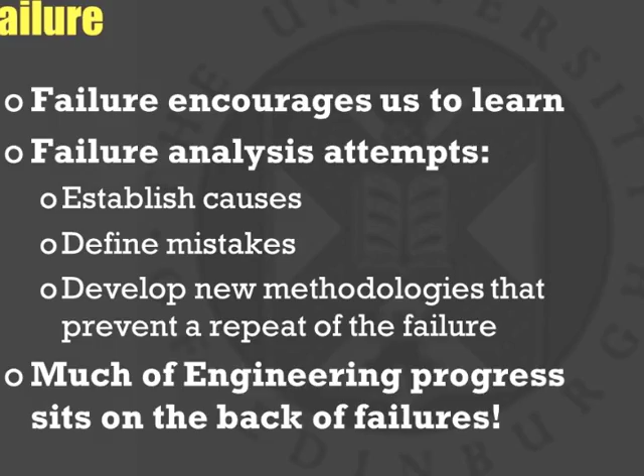And the truth is that much of engineering sits on this kind of failure. We've learned from aircraft crashes, we've learned from train derailments, we've learned from collapsing buildings, we've learned from bridges falling down. A lot of engineering actually relies on failures to wake ourselves up, to open our eyes and allow us to start reflecting. But the key part of understanding a failure is the failure analysis.

If we don't do a proper failure analysis, if we don't have the tools for a proper failure analysis, the tragedy is wasted. And this is the one thing that we have to try to avoid. This is the one thing that we deeply have to prevent, because given that the tragedy is there, the failure has to be able to enable us to understand what our mistakes were.

So in a way, this is the line of thought of this presentation: understanding from the failure analysis, understanding from what happened that day, and understanding from our current practices how we actually design buildings better. Are engineers learning from disasters? This is really what we would like to do.

The problem in this type of situation is that when you're looking into a disaster like the World Trade Center, it's a combination of a number of different things: the actual physical event, our perception of the nature of the event, and all the politics associated to an event that was so visible and originated in a political issue. So the investigation in this particular case was very difficult, requiring the handling of so many things that in many cases prevented the true understanding of the problem.

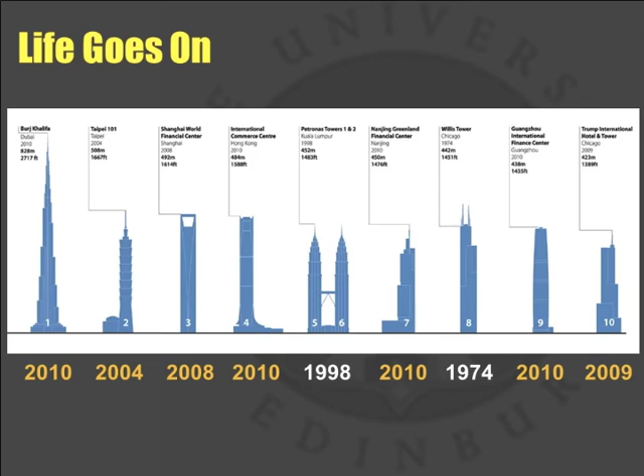Now, this is what's been happening in our world of tall buildings. If you look at the top 10 highest buildings in the world, 8 of those have been built after 2001. If you look at the top 100, you will easily go above 40 top buildings being designed and built after 2001.

So we are trying to understand what made these buildings fail, and in the meantime we're building more complex, taller, more sophisticated buildings every day. This is what industry does, this is what evolution does, this is what innovation does. We have to move on, and we didn't move on only in height, but also in complexity.

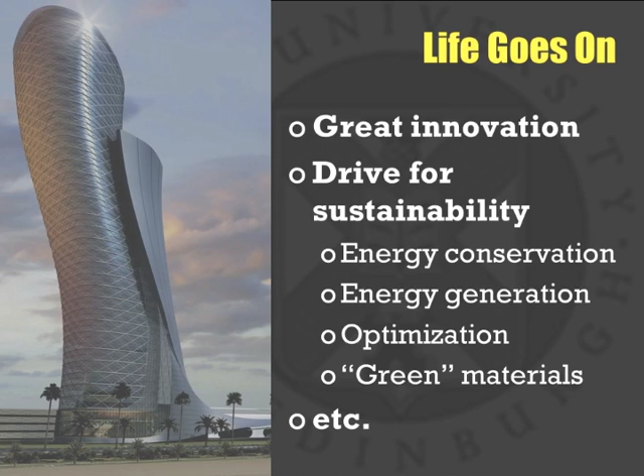This building, if you look at it, has certain particularities. First of all, it's a tall building. Second, it's the most inclined building in the world. All of a sudden you're introducing structural constraints that are extremely unique, pushing the envelope beyond what we had done in the past. Buildings like this are not built every day, nevertheless buildings like this are built more and more often. Now, inclining this structure like this, does it make it more vulnerable to fire?

These are the kinds of questions we need to ask ourselves. When we design and build the World Trade Center, we design and build it on the basis of certain criteria, certain rules, certain codes, certain standards, certain tools. Nevertheless, those tools, codes, standards, and criteria failed on us. Now we're building a building that poses all sorts of new sets of questions, and we truly are in a position where we really do not have the answer.

But life goes on. Not only do we do that, but for example, we're using these curtain walls. Curtain walls represent a very interesting fire problem because in a way they create the potential of gaps between the floors and the wall that enables the fire to grow very fast. And we've seen that in a couple of tragedies in Shanghai and the CCTV towers in China just recently.

So not only are we putting curtain walls, but we're creating double skin facades. Why do we do that? Because of sustainability, energy conservation. These are the drivers of our industry. Fire engineering is this little. We're being pushed around left and right because people want green buildings, they want energy conservation, they want to put energy generation and put a huge turbine on top of the building.

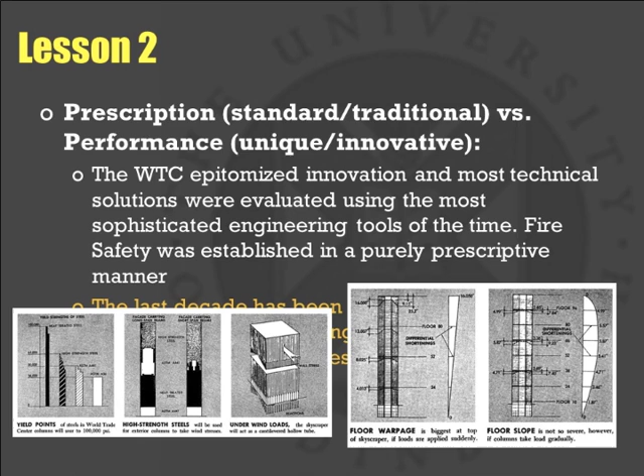Now, the second lesson that we learned was the application of that. So basically, prescription versus performance. Now, what is prescription? Prescription is basically looking into buildings, seeing buildings that are fundamentally homogeneous, that have so many things in common that I can classify them in a way such that the same rules apply to all of them.

So I can more or less establish that these buildings work correctly, and once they're classified, then I can say, if I use this set of rules and you follow the rules strictly, I can more or less guarantee you that these buildings will work. Nevertheless, there's never an independent analysis of each building to establish its true performance.

Now, performance design is a design that uses all engineering tools to try to look in a proactive way how this building is going to perform. Now, if the building cannot be classified, if the building is unique in nature, then we are required to do a performance analysis. We have to be able to establish if that building is going to be safe.

So this question comes up. What are tall buildings? Tall buildings are by definition unique and innovative. They're optimized structures, and therefore they require, by necessity, some form of performance-based analysis.

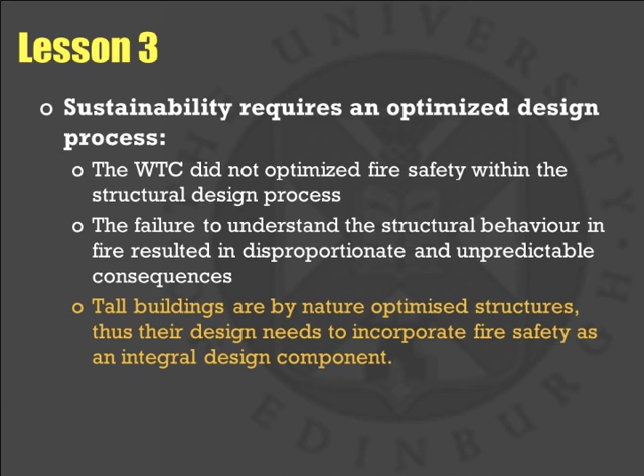Now, third lesson: sustainability requires optimized design. This is very important because when you're looking into sustainability and trying to minimize consumption, trying to minimize energy, trying to conserve as much energy as you can, you also have to include fire, and integrate all this in an optimized manner. The only way you can do this is by putting fire safety into the design process in exactly the same way. Now, the World Trade Center did not optimize fire safety, it slapped it on.

Basically, the building was finished, it was done, it was completed, and what did we say? Let's put fireproofing on it, let's delay the heating of the structure, and it'll work. We believed it would work, but it didn't. So we didn't optimize fire safety into the design process, and we made a big mistake by not doing it.

So the failure to understand the structural behavior in fire resulted in the disproportionate failure. That was the key. The problem was that the structural engineers did not understand fire. They designed the building for everything else, and they delegated fire to the prescription. The architect prescribed a thickness of fireproofing, end of story. There was never an analysis that actually was done to show truly how this building was going to perform structurally in the event of a fire.

Now, tall buildings are by nature optimized structures, and therefore their design needs to incorporate fire safety as an integral part of the optimization process. If we don't do this, then the buildings are not going to perform adequately, they're not going to be optimized, and therefore they're not going to meet the goals of sustainability.

Let me give you an example of what really happened. If you look at the way we design buildings, basically we created this curve. This curve is what we call the standard fire, and it's a normalized curve by the Americans, by ISO, by British. Everywhere in the world, from Chile to China, you will find fundamentally the same curve. So what is this curve? It's a standard fire, a curve against which we're going to test our structural elements.

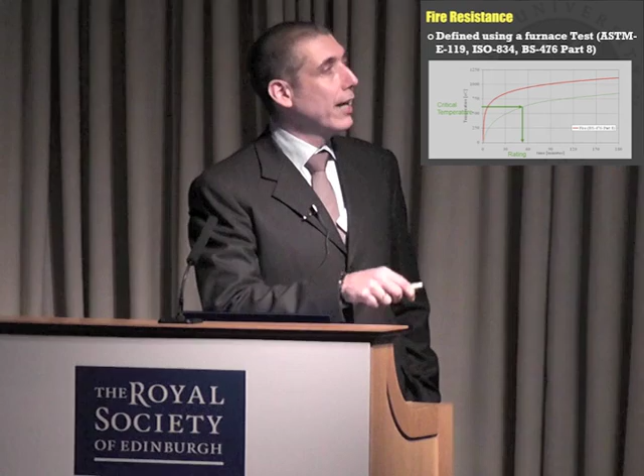What does it represent? The worst case fire scenario. We run a whole bunch of experiments and tests, and all the temperature evolutions of this fire fell below this curve. So we can argue that this curve represents a worst case scenario. Now, our knowledge has shown us that maybe it's not necessarily the case, but within the confines of most of the things that we do, fundamentally it does represent to some extent a worst case scenario.

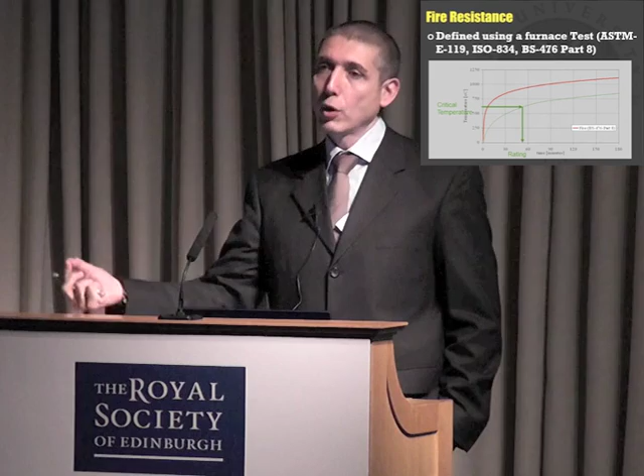So now we take this curve that represents the worst possible fire, and we reproduce it in a furnace. We make a furnace follow that temperature-time curve, and in that furnace we're going to stick a structural element. The structural element, because it's heavy, because it has mass, is going to heat much slower than the furnace, and eventually it's going to reach some sort of critical temperature.

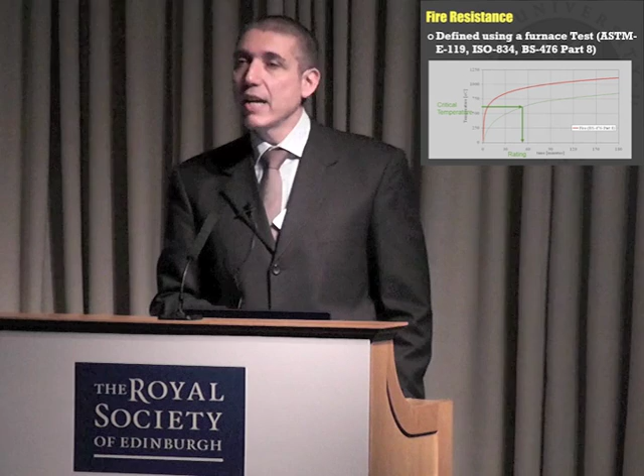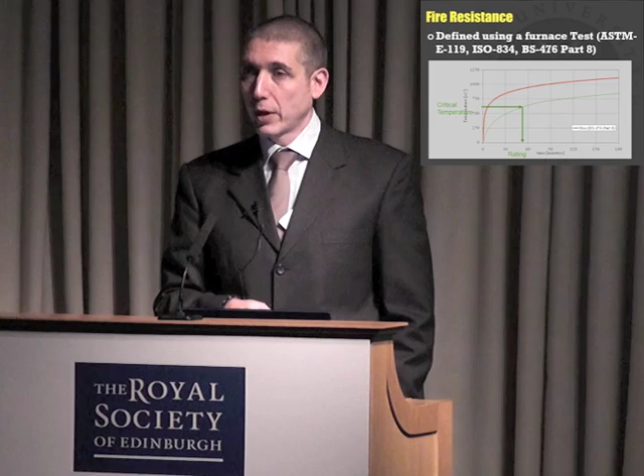That's going to bring us to what we call the fire rating. So we can say, for example, that if this structure fails at this point, I will go to the next 30-minute mark below and say that the rating of the structure is 30 minutes. If that is less than what prescription requires, I will put insulation to try to delay the heating and bring the failure temperature to a much longer period of time.

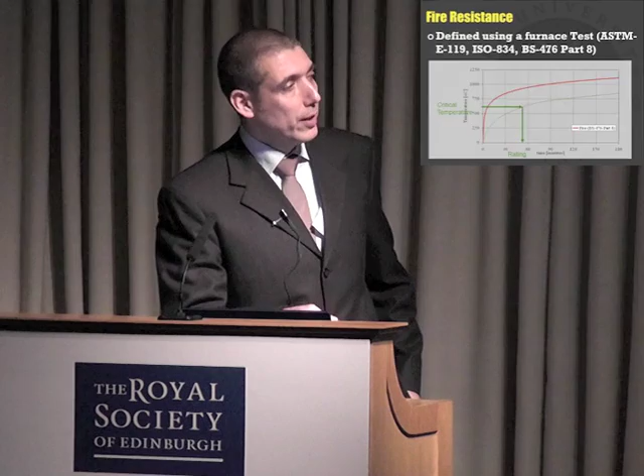The World Trade Center was designed, some of their components, to withstand 3 hours, 180 minutes, and other components, the smaller minor components, to withstand 2 hours, 120 minutes. This didn't work. Now, the question is, the buildings failed in less than an hour.

So, is it the problem that our fire was not a worst-case scenario? That's what people will argue. They will say, well, kerosene fire, very large fire, extremely hot temperatures. Completely false. That fire was actually a very moderate fire that was well within the context of this worst-case scenario. It was not the fire. The fire was not as big and as hot and as deadly as people thought. The fire was an office fire that was well within the constraints of the problem.

Now, what was the problem? The problem was the structure. It was the innovation that was embedded in the structure that fundamentally changed this.

Now, this critical temperature is defined on the basis of material properties. Basically, when steel heats up, its resistance drops. So when it drops to 50%, I define it as my critical failure condition. That's completely arbitrary, unrelated to the design of the building or how you put it together.

In the 90s, we learned that it's absolutely critical how you put a building together to define what this failure temperature was. So relying on our prescription was a problem. We should not have relied on this critical temperature, and this was the weakness of the design.

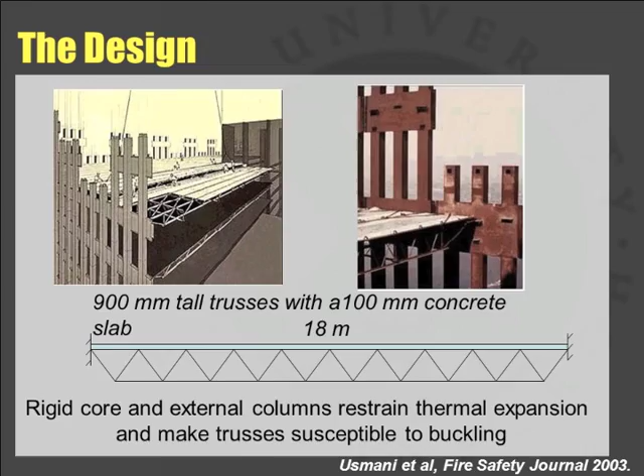So if I look at the problem, basically what was it? You had a very rigid set of columns on the outside, a very rigid core in the middle, and a very lightweight slab. This enabled building this structure—a technological innovation that allowed it to be built fast, cheap, economically, and with open spaces that were very desirable. So fundamentally, it worked as a structure.

But what happens when you completely constrain something very lightweight? As soon as it starts heating up, it tries to push its way out, and it can't, because it's restrained by very rigid columns and a rigid core. Because it can't expand, it buckles. At the beginning it's pushing the columns out, so you can see them bending outward. But eventually, when it fails, it brings the columns back in.

There's no controversy on that. We understand that now—we've learned it from the World Trade Center. We've learned that that was the failure mode for these buildings.

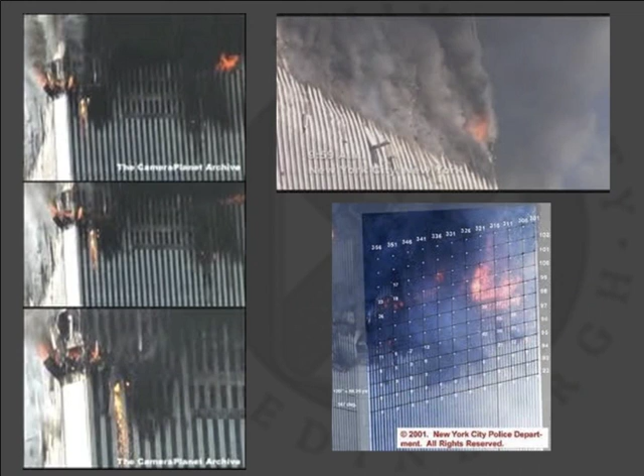Now, if you look at these photographs, you will see it. Earlier in the fire, you can see how the columns are being pushed out and the covers are falling off because the floors are trying to expand and push the columns out, but they can't. Later in the fire, you see the opposite—the floors are sagging, and the columns bend inward, and eventually that's what brings the columns to buckle and the building to come down.

NIST did a reconstruction where they aligned every single column and showed the deflections. Early on they were outward, later on they were inward. At the moment the collapse was triggered, you could see these columns moving inward in certain areas of the building.

There's no controversy on this—we understand that that is the failure mechanism. The details are very difficult to understand, but the fundamental failure mechanism is well understood.

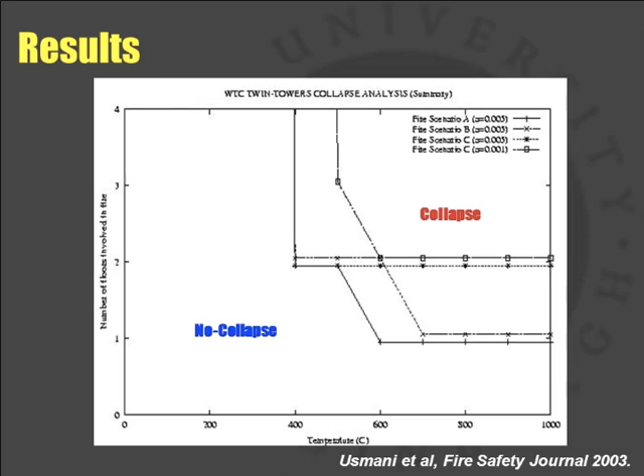But this is a part that very few people understand. If you actually look at this building with no damage, with the actual fireproofing intact, this is an engineering analysis done on the intact building that shows it had a massive vulnerability. Because of the nature of the structure, when you analyze the range of collapse and no collapse, you can see that if a fire extends for more than two floors, your failure temperatures are not 500 or 600 as your materials should give you, but they actually go down as low as 400 or even less.

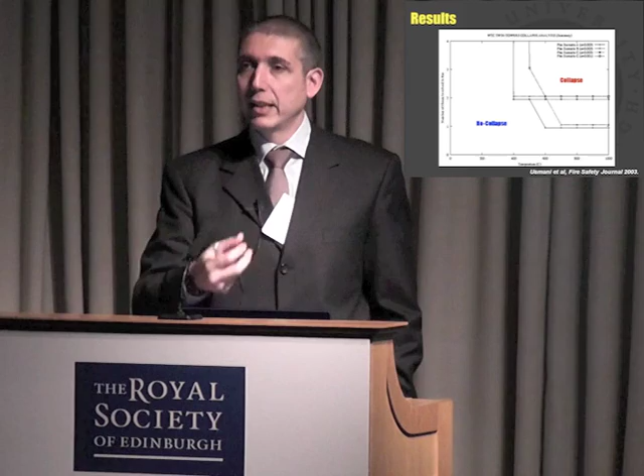Now imagine what happens when you add the dislodgement of the fireproofing and the damage introduced by the aircraft. This curve probably shifted even lower. That clearly explains why these buildings came down much earlier than they should have.

So this is the part of the analysis that makes you truly understand your design weaknesses. This was never done for this building—it was done for wind, it was done for foundations, but not for fire. We ignored completely the fact that how you assemble the building determines the failure temperature. It's not how big the fire was or how complicated it was—fundamentally, we ill-defined the failure temperature because we did not understand the global behavior of the building.

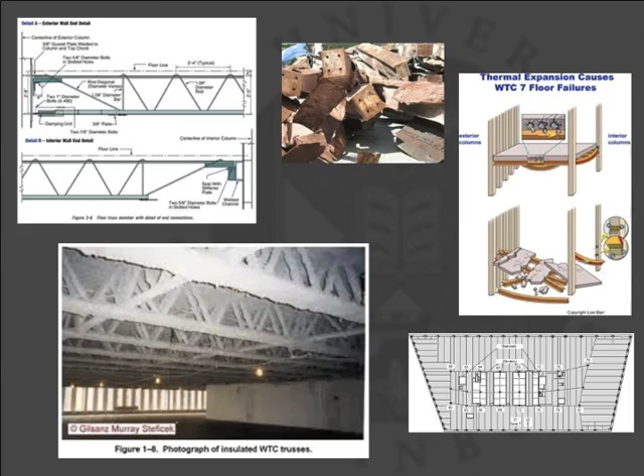So there you go, very good lessons learned. We've learned a lot from this—the science has improved enormously through the investigation of the World Trade Center. We've understood the role of connections and how this type weakens the building even further. We understood the role of fireproofing, what happens when it's dislodged, and the importance of having excellent quality fireproofing. We also understood, in the World Trade Center, the problem of asymmetry.

NIST will claim that because this building is asymmetric, once this corner starts heating, this girder will be pushed outwards and dislodged from its connection, resulting in the failure of floors that eventually triggers the collapse of the building. Controversial? Yes. Complete? No, it's an incomplete conclusion. Nevertheless, it is clear evidence of the things we have learned in the process. In the past, nobody would have ever thought that an asymmetry and the failure of a single connection could bring down a 47-story building. Today, we actually do believe that might be possible.

Once again, a very important technical lesson that we've learned through the World Trade Center. So there are a lot of technical lessons that basically enforce the idea that if you want sustainable infrastructure, fire needs to be included in an explicit way.

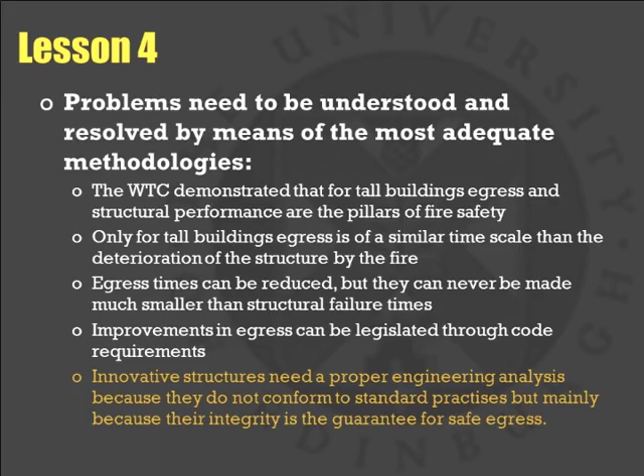Now the problems need to be understood and resolved by means of the most adequate methodologies. This is where we found ourselves in a problem, because World Trade Center demonstrated that egress is very important. We need to get people out, and structural performance are the pillars of fire safety, because if the building comes down, I will never be able to get the people out. So I have to guarantee that people can move through safe paths, but also that the structure remains in place.

The problem is that for tall buildings, egress is extremely slow. A rule of thumb is about 1 minute per floor. A building that has 110 stories will take you at least 2 hours to evacuate. So if the structure is not designed to withstand the fire until the fire burns out, the structure is going to collapse with people inside the building.

In tall buildings, the overlap of times between egress and structure is completely coupled. In smaller buildings like this, you can exit in 1 minute while your structure has not even begun to heat up. In tall buildings, the two things are absolutely linked, and they cannot be separated.

The problem is that I cannot speed egress. I can't, because it depends on how fast people can move. No matter how big I make the paths, it's going to reach a peak, and that's the speed at which people move. Now the problem is that life goes on.

Unfortunately, innovative structures need proper engineering analysis because they do not conform to standard practices. So I need to do a structural analysis to guarantee the second part. But because life goes on and people have to move, what did we end up focusing on? We ended up focusing on egress, when the truth is that we have very little to gain with egress.

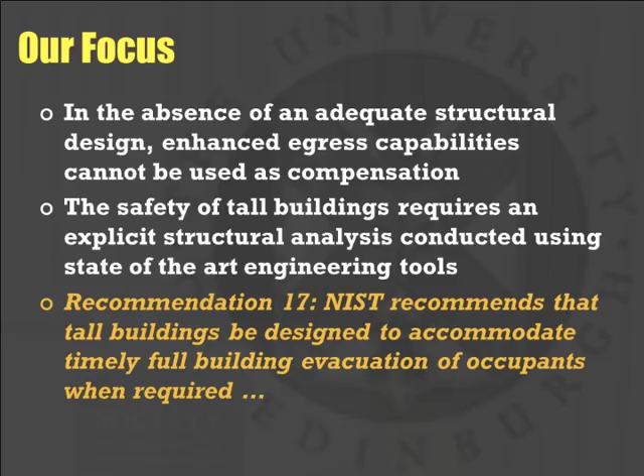So at the end, the safety of tall buildings requires explicit structural analysis, and we have decided to completely ignore this. Most of our changes, as you can see by NIST's recommendation number 17, are focused on accommodating the best possible egress. Yes, we want that, okay, but it's not the problem we're trying to solve. The problem we're trying to solve is better designed structures.

So this brings us to lesson 5. Lesson 5 is fundamentally the one that breaks the problem. There's no well-defined responsibilities. The architect is supposed to define the fireproofing, the structural engineer is supposed to design the structure. Nobody designs the structure for fire.

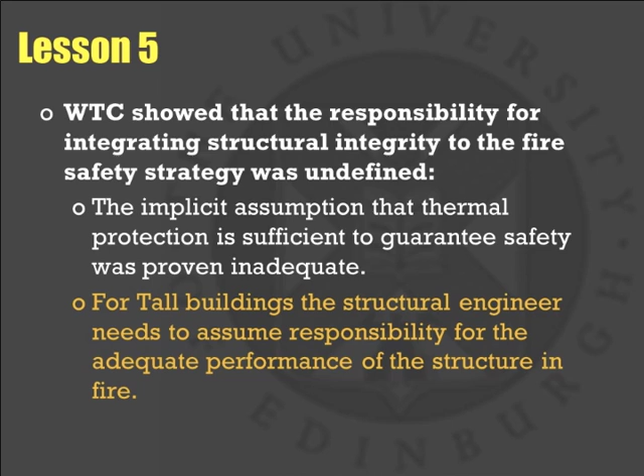So at the end, the implicit assumption that thermal protection is going to fix the problem is wrong. Nevertheless, that's what we rely on. Now, for tall buildings, the structural engineer needs to assume responsibility for the adequate performance of the structure in fire. That is an important lesson that we've learned. If the structural engineer doesn't assume the responsibility, there will never be a properly designed building for fire.

Innovation introduces complexity, as we've seen, and thus the drive for sustainable tall buildings is introducing fundamental changes in structural design, material selection, and potential fire conditions. Once again, we go back to the uniqueness. The World Trade Center demonstrated that to establish an adequate fire safety strategy, there is a need for professionals of great knowledge. People need to be able to understand the behavior of structures in fire, and the level of knowledge necessary for that is extremely high. Now, sustainable tall buildings require the involvement of professionals with that level of competence.

In the design of a complex and comprehensive fire safety strategy, we have to involve people that understand things. Now, what did the World Trade Center investigation do? It basically questioned the competence of our engineers. We were confident. We thought we knew what we were doing. But the truth is, what does a structural engineer need to know to properly design a building with fire?

In 2001, we did not know. We had no idea what a structural engineer needed to know to design a building properly for fire. Neither did we know what a fire safety engineer had to know to do the same thing. The two of them were designing their parts of the building. There was no integration of the disciplines. Everybody thought they had the problem under control. Nobody did. That is a fundamental weakness that was unveiled by the investigation.

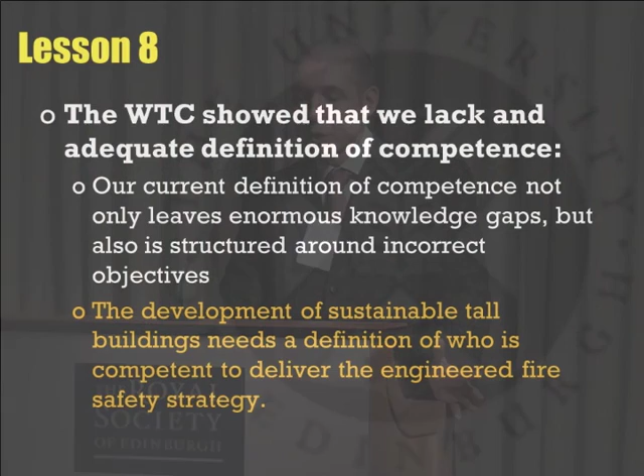So we're getting to the end of the story, and we're beginning to realize what the big problem is. The problem is competence. At the end, the World Trade Center showed that we lacked an adequate definition of competence. That really ends up being the end of the story.

We did not have a proper definition of competence, or who should be doing these things and how they should be done. Our current definition of competence not only leaves enormous knowledge gaps, but is structured around the incorrect objectives. It's structured around solving individual problems and not the integrated, explicit performance of the building, which is what is going to give us sustainable infrastructure.

So we not only have no definition of competence, but we're looking in the wrong direction. At the end, the development of sustainable tall buildings needs a new definition of who's competent to deliver the engineered fire safety strategy. We don't have that today. After 10 years since the World Trade Center, it's completely obvious that we need it, but we don't have it.

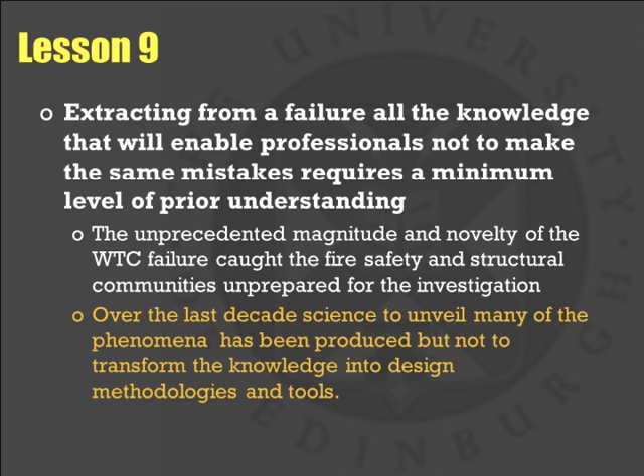So, lesson 9 is: extracting from a failure all the knowledge that will enable professionals not to make the same mistakes requires a minimum level of prior understanding. Now you know where I'm getting to.

The truth is that the unprecedented magnitude and novelty of the World Trade Center failure caught us by surprise. We thought we knew everything, and we knew nothing. That's the truth. We were boxed in our own ideas, and we never understood the complexity of the integrated analysis of buildings. So at the end of the day, we were communities fully unprepared to deal with this particular type of investigation. So unfortunately, we wasted a tragedy.

We had a tragedy that is going to mark us forever. Nevertheless, we did not have the knowledge to tackle an investigation in an adequate way. We fell into all the cracks of our gaps of knowledge, all the cracks of the lack of framework to analyze these things. And there we are at the end, after 10 years, basically with more questions than answers.

So the challenge is, the gaps of knowledge are now evident. We know where all the holes are. That's what we did in our investigation: identify everything that we didn't know. Yes, a great thing, because at least we know where the gaps of knowledge are.

The future of tall buildings design, unfortunately, depends on our capability to continue filling those gaps faster than technology evolves. We are this big. The construction industry is massive. They're moving so fast that we're clearly not keeping up.

So this hope that I put in here of being able to move as fast as our capability to innovate is a hope that every day I wake up in the morning asking myself, how much terrain have we lost today? And I seriously do not have an answer for that.

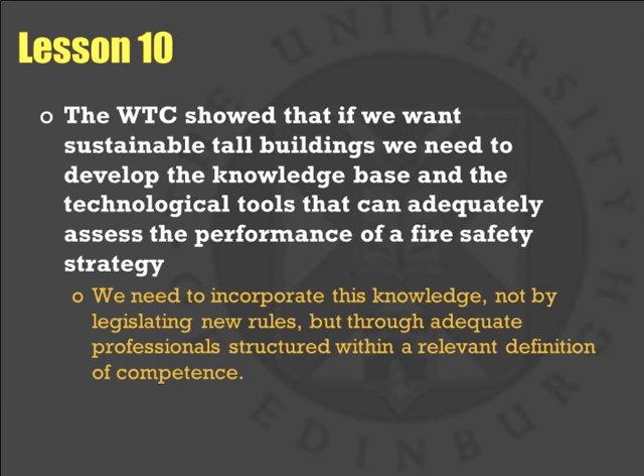So that basically brings me to lesson 10 and the end of this story. The World Trade Center showed that if we want sustainable tall buildings, we need to develop the knowledge base and the technological tools that can adequately assess the performance of a fire safety strategy. That is absolutely necessary. We need to incorporate this knowledge not by legislating new rules, which is what we've tried to do to make the apparatus continue to move. We've thrown rules here, we've thrown rules there, widen the stairs, add more fireproofing, do this, do that. That is not going to work.

A building whose structure is poorly designed is a building that is vulnerable, that is weak, and in the event of a fire has unpredicted behavior. So that is not going to work. The only way to fix this problem is through an adequate professional structure within a relevant definition of competence. Today, we don't have that. Our definitions of competence are not adequate and they're not relevant to the problem that we are addressing. So we need to legislate, promote, and invest in competence, not on standardized solutions. Thank you very much.